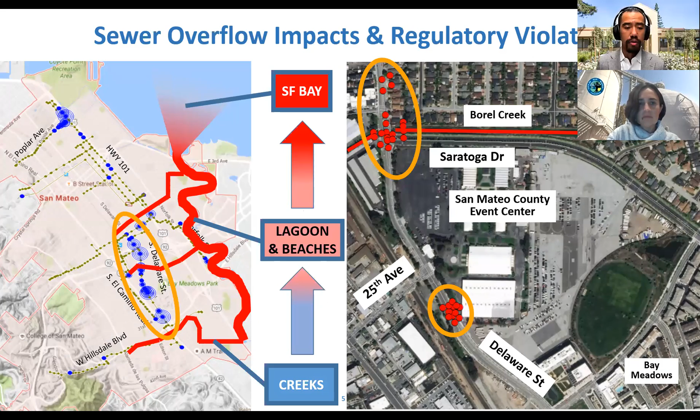So why are we here? Primarily because of sewer overflow impacts and regulatory violations. If you see on the diagram on the left, the blue circles are all the sanitary sewer overflows that have occurred historically and in our model, and a lot of them are occurring along the Delaware corridor. When a sanitary sewer overflow occurs, it pretty much flows out of the manhole onto the street, into the gutter, into the storm drain, into the creeks, and then eventually into the San Francisco Bay.

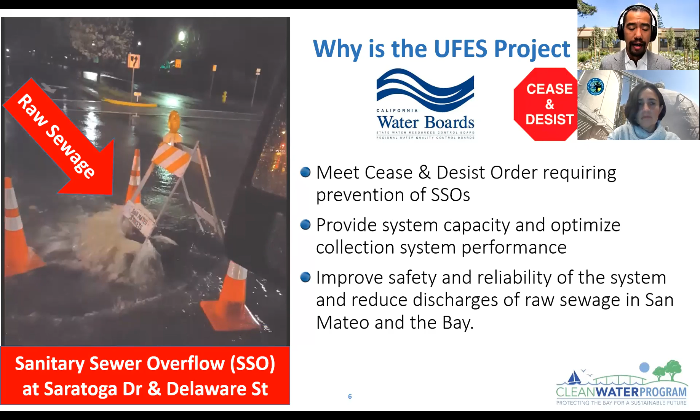So we ultimately want to stop this. We are aware of this, we've been aware of this, and even the California Water Board is aware of this, and they've issued a cease and desist order in 2009 requiring the city to prevent sanitary sewer overflows. This is why we're spending a significant amount of money to improve our wastewater infrastructure. We want to provide system capacity and optimize collection system performance, and overall improve safety and reliability of the system and reduce discharges of raw sewage in San Mateo and the Bay. This ultimately will help provide good for the environment as well as our community.

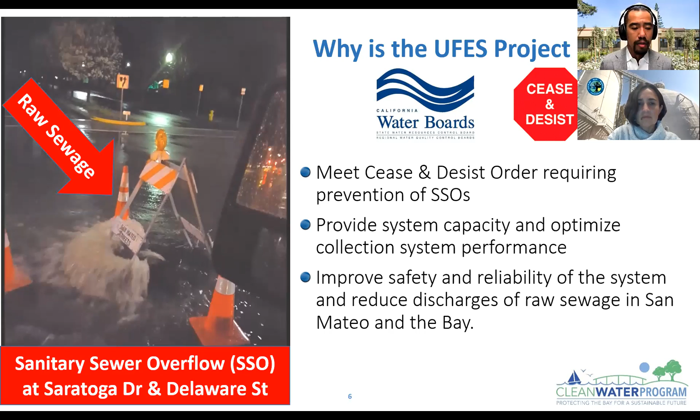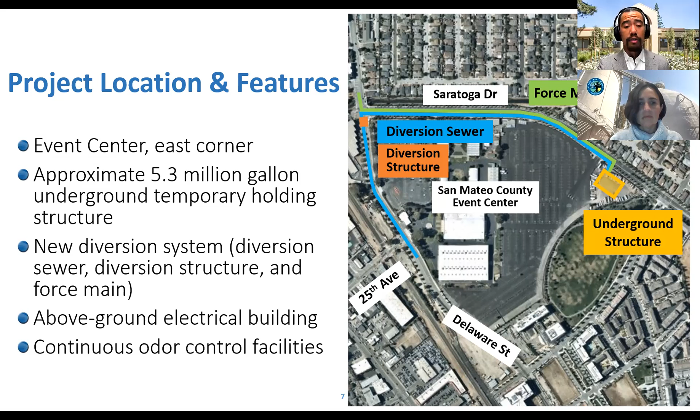The other components to this project is we're going to have an above ground electrical building that's also going to be located adjacent to the underground structure on the event center site, and continuous odor control facilities.

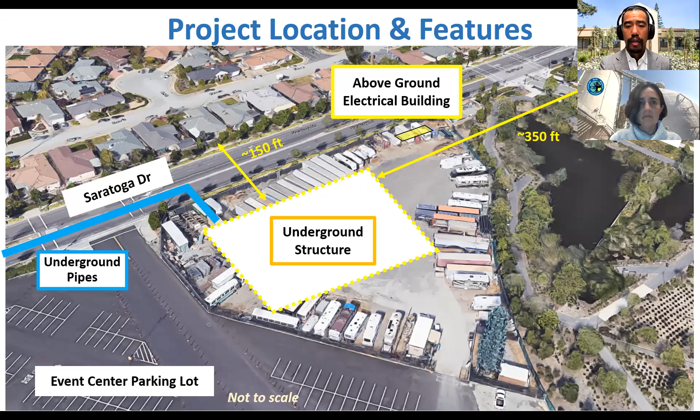This is another aerial rendering of what the structure will look like, and some perspective as to how far it is from the adjacent communities. The underground structure is shown there. It's approximately 150 feet from the excavation to Fiesta Gardens' closest residential properties, along with 350 feet to the Bay Meadows community across 28th.

We also wanted to talk about the construction contractor pre-qualification process. The contractors that we reviewed, we basically advertised out to obtain statement of qualifications, and every contractor that was able to bid on this project met these pre-qualification criteria requirements. Some essential requirements such as license and insurance, history and performance, health, safety, and labor compliance, references and experiences. We wanted to make sure that whichever contractor bid on the project were qualified to meet it, and not everyone who submitted a statement of qualification met these requirements.

So ultimately in May, we awarded the construction contract to Anderson Pacific. They are leaders in the construction of water and wastewater infrastructure. They have over 53 years of experience on similar projects to ours, and they have, since the beginning of working with us, proactively identified risks and collaboratively worked with us to identify solutions.

Now, what to expect during construction. Tom Williams is going to be talking a lot about the UFES activities on the event center site by phase. There's 6 different phases. I'm not going to talk about them here, but Tom will walk through all of those, including the pipeline construction. And then Bethany Lopez is going to talk about the traffic control plan requirements associated with that pipeline construction.

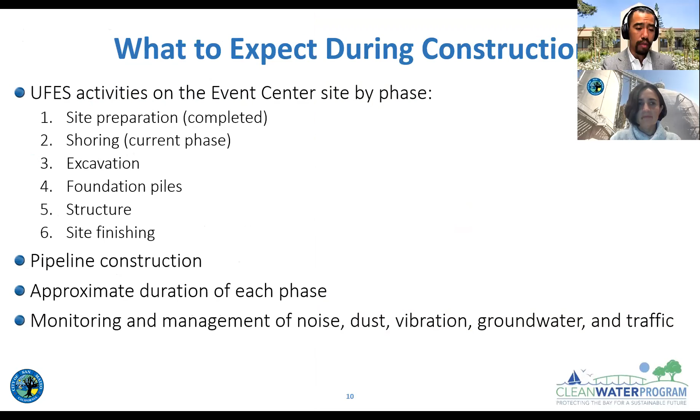In terms of traffic routes for the event center site, we actually purchased an easement from San Mateo County, since a lot of the construction traffic coming to and from that underground structure will need to route through that access easement to Delaware, instead of routing across Saratoga to get to the site. This was at the request of the community when we were getting the special use permit for the project, and one of the conditions of approval was to route a majority of the traffic along this easement route.

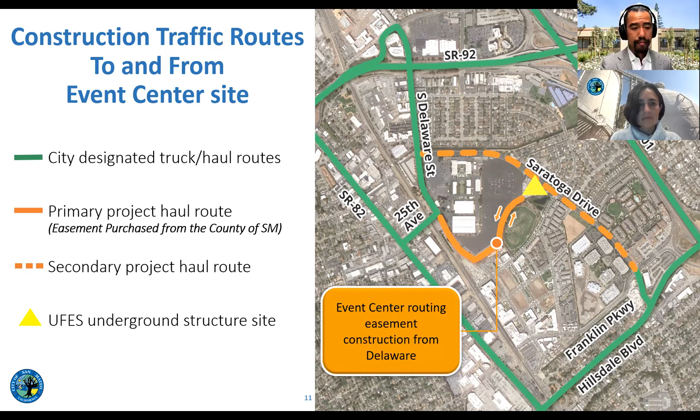Coming up next are some explanations about the different phases of the event center site from Tom Williams.

All right, very good, I think I've turned my video on. So you all are probably familiar that the work started, and there was some site preparation. It's not a very complex site, so essentially it needed to be cleared. There were some trailers that had to be moved, and they had to do a little bit of grading. That's complete, now we're at the shoring phase, so we can go to the next slide.

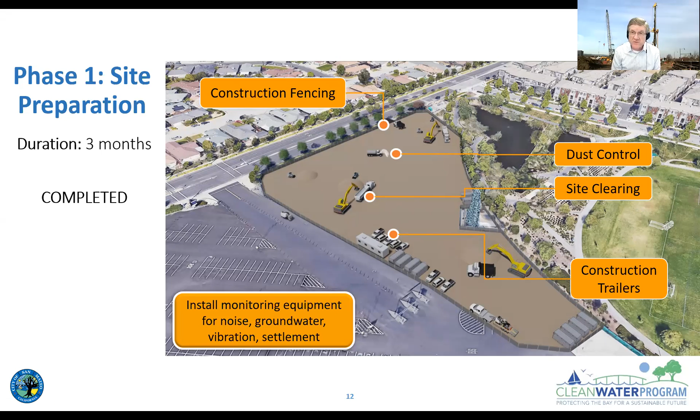So what we're doing is, in order to isolate this structure and protect the groundwater levels, we're building a watertight box, essentially, and we're going to build another concrete box inside it. What's happening today is they're doing a deep soil mixing wall. The machine you see with the tower, like a drill rig, is mixing concrete with soil and forming a watertight barrier around the perimeter, and inside that we'll excavate. That's what's happening currently.

There's a little bit of soil waste that will be removed from the site, but mostly a little bit of cement being delivered, and the cement's mixed on site.

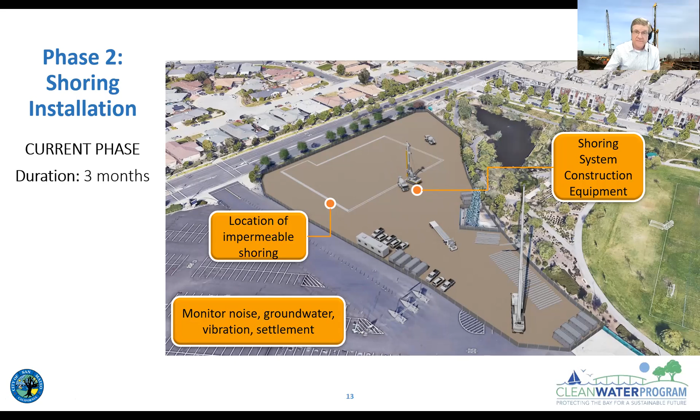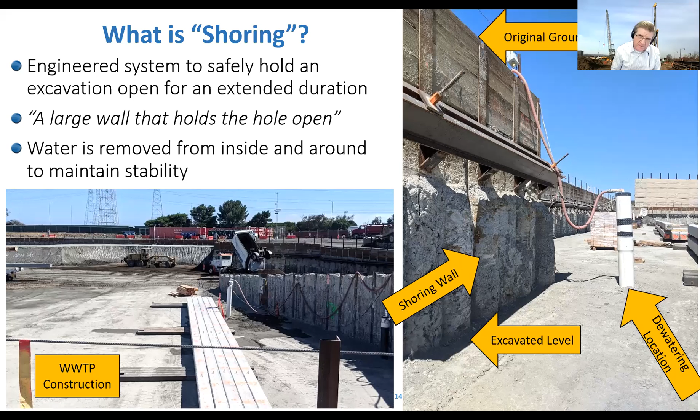It's reinforced with steel, and then there are special tie rods that go back into the ground that keep the wall vertical while we do the excavation. This is the actual equipment working - you can see in the picture on the right, the steel beams that have been put in place. They form the reinforcement for this concrete wall, and it essentially goes around the perimeter.

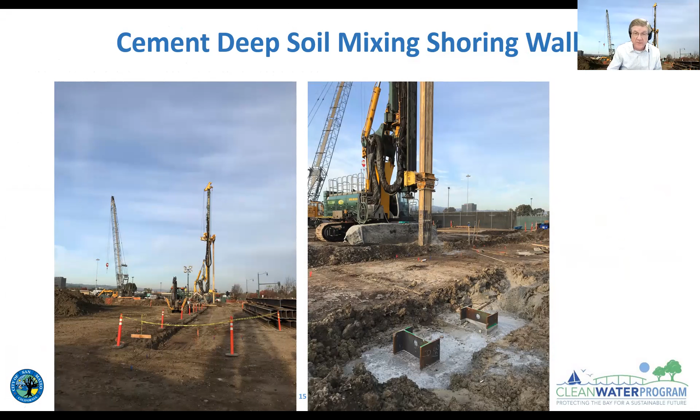Now we will withdraw water from the inside, but it won't let the groundwater enter from the outside, so we won't draw down the groundwater in the perimeter. This is essentially the dewatering plan - you can see the water's drawn out of the pit where we're working, but there's very little effect on the groundwater. Now we're monitoring all this.

We're monitoring the pit, and we have wells around the neighborhood that are watching the groundwater levels, so we have a trigger point. If they drop below a certain level, if it's too much, we would stop work. But groundwater goes down very slowly, so we would know well in advance if we were pulling down the groundwater. Next slide.

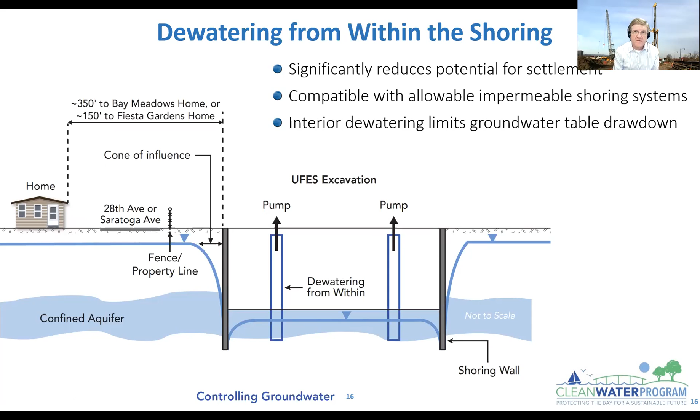And then as this wall is finished, excavation will begin, and that's probably the heaviest work that'll be visible. Dump trucks will arrive, and they'll be loaded and haul away the spoil material from the pit. There's a timeline slide coming, but that goes on for 5 months, and that will be essentially the work during that period - we'll be digging out that very large pit for the construction.

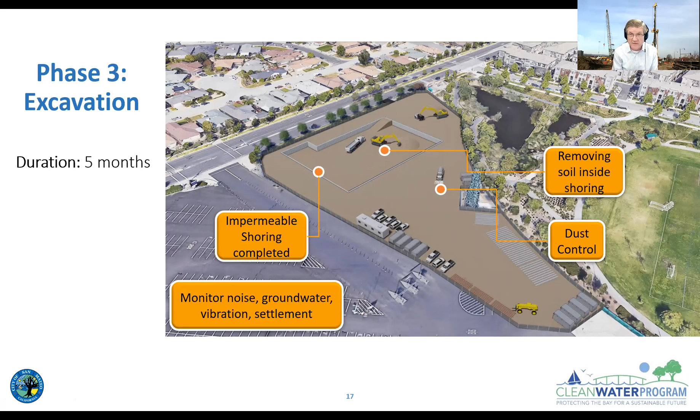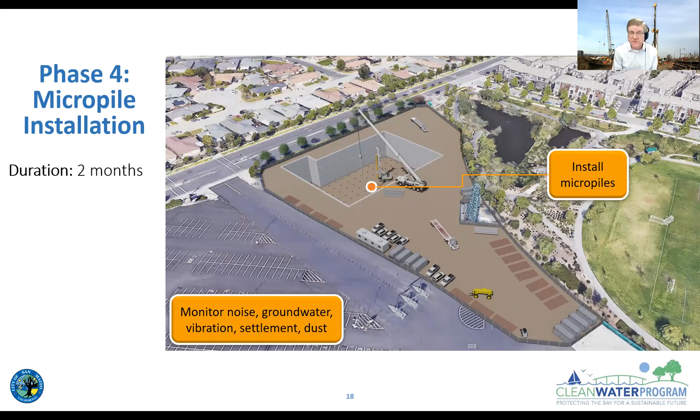Next slide. And once the pit's dug, then micropiles are installed. Now these piles are drilled, and they're small, they're short, and they're not hammered, so there shouldn't be very much noise associated with them. That's how the machine looks - it's a small machine that drills this pile, and for stability of the structure, they keep it from the uplift from floating. The structure's empty most of the time, so there's a fairly large uplift pressure on it from the groundwater, and they're just part of the structural integrity of the building. Next slide.

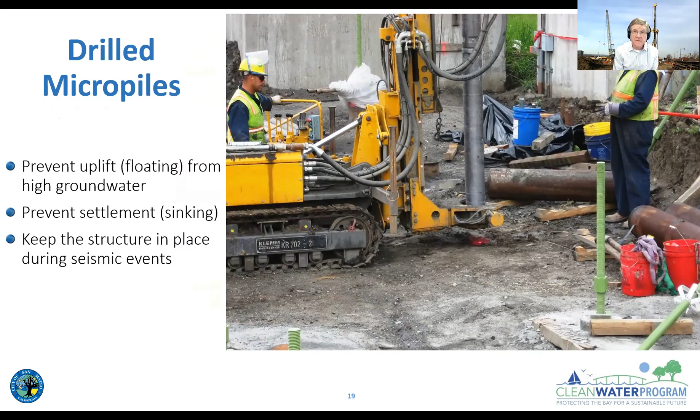So after the piles are drilled, we can begin the slabs and the concrete work. This will be the structural phase, and it will take many months of construction. It's a poured concrete structure, so there'll be a lot of concrete arriving, generally about once a week there'll be a pour with a flurry of activity, and the rest of the time will be finishing and preparing for another pour.

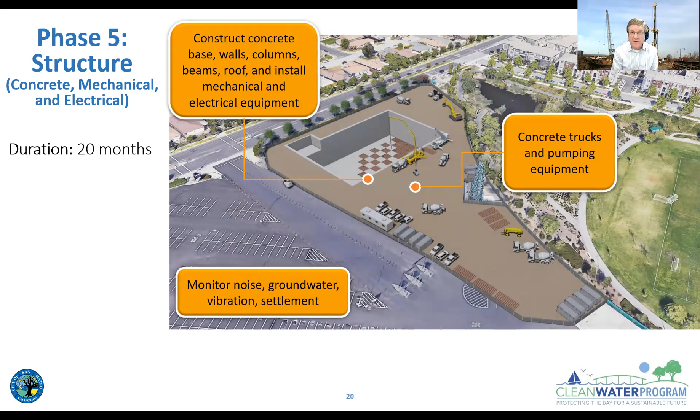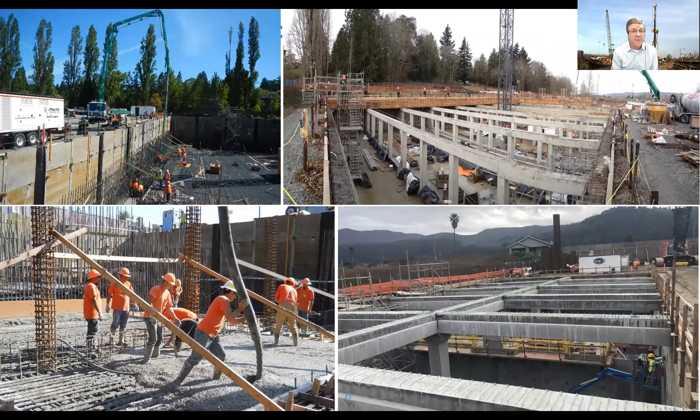These are examples of this type of structure being built in various places. It's a pretty intense operation with lots of concrete work.

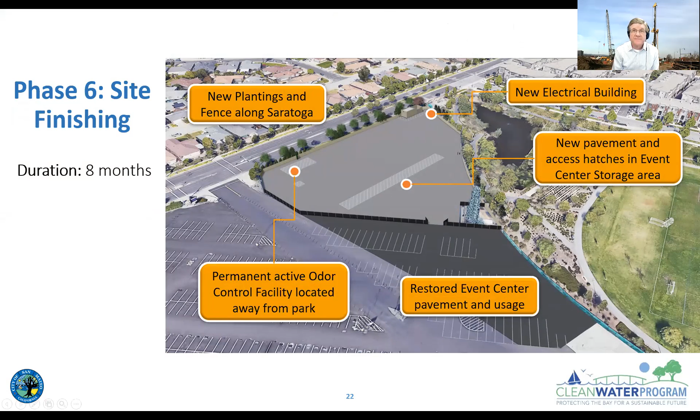There's a total station on the Saratoga side on the fence. There are reflectors, prisms placed in strategic locations all around the area, and this surveying instrument is measuring those constantly, watching for any movement or changes, any tilt. There's prisms on the two Bay Meadows buildings on 28th near Saratoga, prisms in the street, the sidewalks, the wall across the street at Fiesta Gardens, and prisms in the parking lot at the event center, and various other ones. There's a numerous set of prisms, so we're watching for settlement through those.

We're watching for vibrations, noise, dust. We've got the camera, we're watching groundwater. There are groundwater wells strategically placed in the neighborhood, plus we have on-site wells. So there's quite a bit of monitoring taking place. Plus we've done home surveys for homes that elected to have those surveys done in Fiesta Gardens and Bay Meadows.

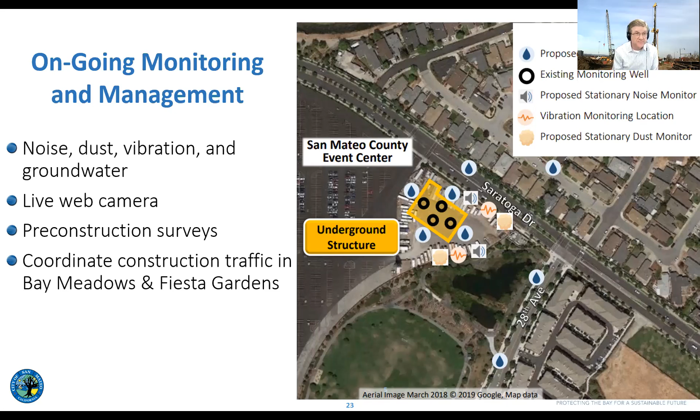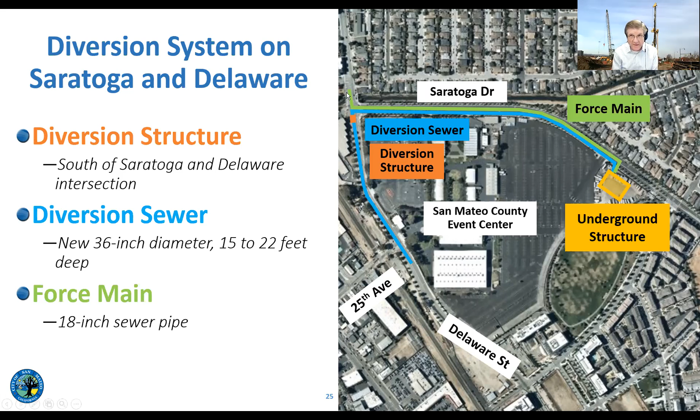Now, to make this system work, there's a set of diversion pipes. In an event, the wastewater has to be diverted into the structure, and when the event's over, it has to be pumped out. There'll be a pipeline built in Saratoga Drive, another pipeline in Delaware, and a force main installed in Saratoga, but it'll be done by slip lining an existing sewer with a resin material, so it won't involve so much construction. This force main will terminate with directional drilling to get under the obstructions at the end.

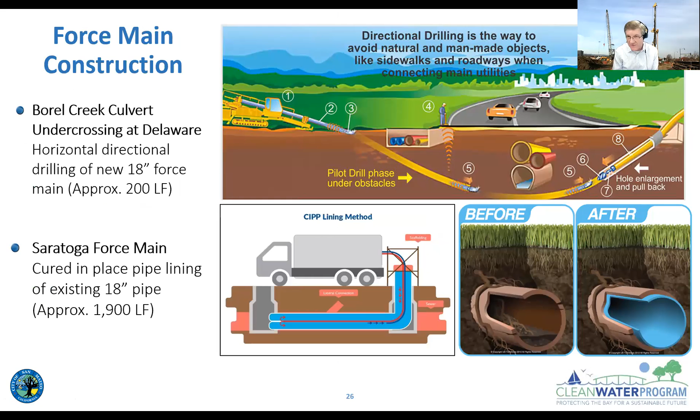So there'll be that work near Delaware and Saratoga. This is the pipe system that makes this work, and it also involves a structure at the intersection of Saratoga and Delaware that essentially is the valve that makes the system work - it diverts the flow to the structure. It's a rather large concrete box also, but not as large as the UFES tank. It'll all be underground, under the street. Nobody will be aware of it being there other than the manhole lids, the hatches.

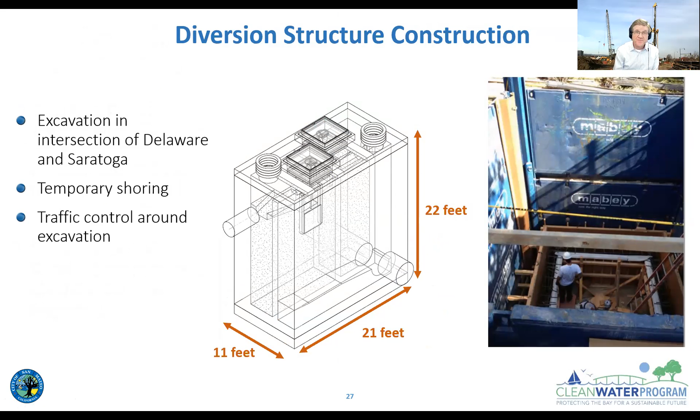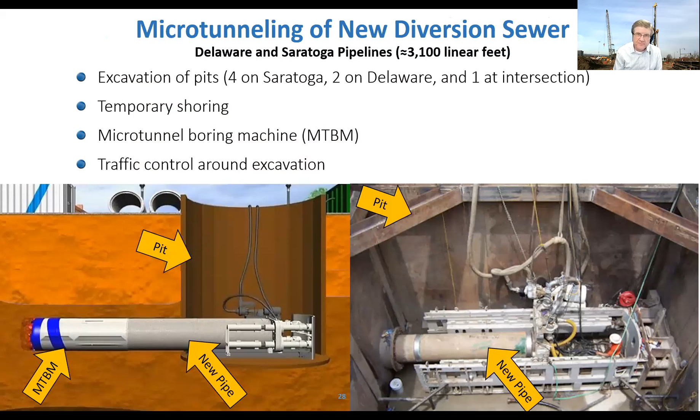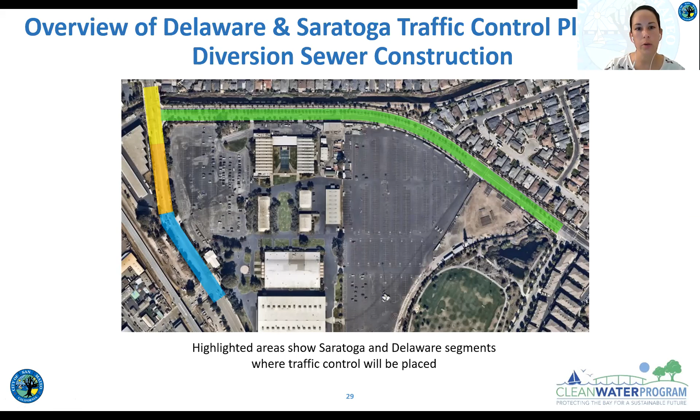So I'm going to talk about how the traffic control for this work is going to occur in this area, and really just kind of lay out the sequence of events for how this all gets accomplished. You can see that there's different colors on the screen, and those all represent a different phase of the work. Some of these will be occurring concurrently, and I'm going to go through how some of those are going to operate in conjunction as well.

We did also want to try to minimize the impacts to these various modes of traffic. So we'll talk a little bit about some of the options that we pursued, or considered several other options, and in an attempt to minimize the impacts to these other modes of transportation, some of those were not pursued because of the duration that they might have, or the impact that they may have.

We did also want to maintain the access for the event center. As you guys are aware, there's COVID testing occurring there, and so we again wanted to make sure that that was unimpeded. And if there are perhaps events down the road, that those events are not impeded either.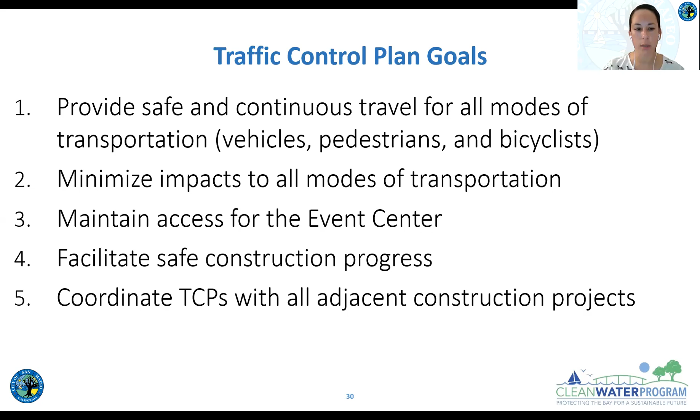We wanted to facilitate the safe construction progress going through this area, and also coordinate with a lot of the other traffic control plans that are going on in this area. So you guys are, I'm sure, very aware of the other construction that's going on in the southerly parts of this section of Delaware. All right, so moving into the first phase.

The first phase is work that's going to occur along Saratoga. The primary function of this traffic control is going to allow for the southerly part of Saratoga to be closed. You guys can see the green here, where the green is shown - that's where that microtunneling that Tom was just referring to is going to be occurring on that side of the roadway. So what that means is that we are going to be shifting the traffic to the northerly sides of Saratoga. These are the westbound lanes.

So these westbound lanes are going to be used to facilitate both eastbound and westbound traffic. We'll be putting up delineators between the traffic to make sure that it's very clear. I'm going to be doing some dive-ins on each one of these intersections to show exactly what that looks like in a little bit more detail.

Some of the other points of this are that, instead of having the eastbound bicyclists in the roadway where they normally would be, we're moving them onto the eastbound or southerly sidewalk, which is adjacent to the event center. And you'll note on the right side of this that we're moving pedestrians, all pedestrian activity, to the north side of Saratoga Drive here.

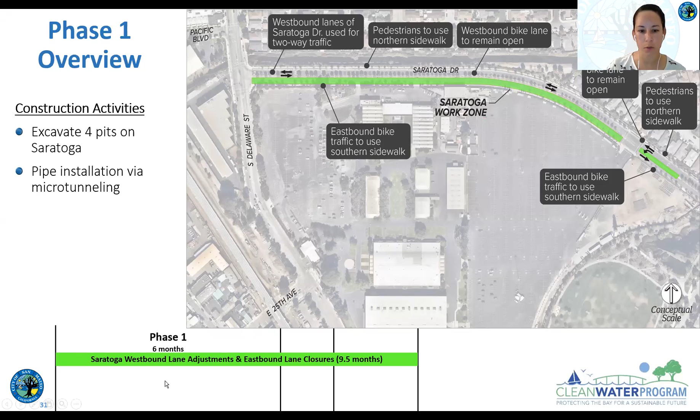As Tom mentioned, this is going to be used to excavate 4 pits along Saratoga. You can see that this phase is going to last for about 9.5 months. You'll see how this phase alone is only going to last for 6 months, and I'll walk through a couple of the other phases that are going to also occur at the same time as this phase. All right, so diving a little bit deeper in, this is the detail of what's going to happen at the Saratoga and Delaware intersection for this first phase.

As we mentioned, the Saratoga eastbound lanes will be closed. We also mentioned that we are going to be detouring pedestrians to the northerly sidewalk, and we will allow bicyclists to use the southerly sidewalk. So in this, we're also going to be facilitating turns from Delaware onto Saratoga. In order to do so, we're going to have to cut back some of this median that's here dividing these lanes.

We're also going to be installing a temporary stop line to push some of the westbound traffic back a little bit, again, to help facilitate some of this movement.

The bike lane on westbound Saratoga is going to remain in place, in its existing location. It's also good to note that this traffic signal will remain on and functioning during this time. That's a really important note because we are familiar with the traffic coming through in relation to some of the other projects, so we wanted to make sure this traffic signal stays functional.

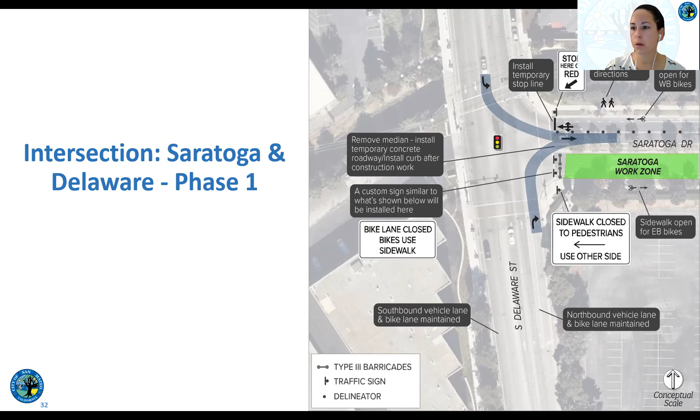So doing another dive into this, we're going to show a quick cross section of what this looks like. You can see the purple arrows on top here, looking easterly on towards Saratoga from Delaware. As mentioned, eastbound traffic is going to be here in the middle lanes, and we're going to maintain westbound traffic as well.

We'll have westbound bike lanes adjacent to the westbound travel lanes as they are today. Pedestrians will be using the northerly sidewalk, and eastbound bicyclists will use the southerly sidewalk. We'll have detour signage at the intersection to make sure it's really clear where everybody's supposed to go. You'll also note the work zone signage that makes it clear that the southerly portion of Saratoga will be closed.

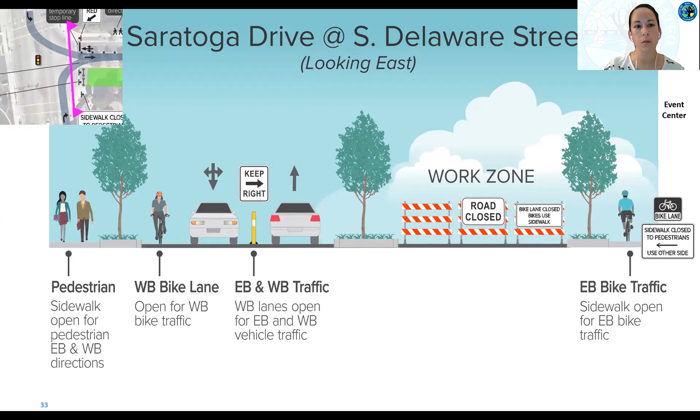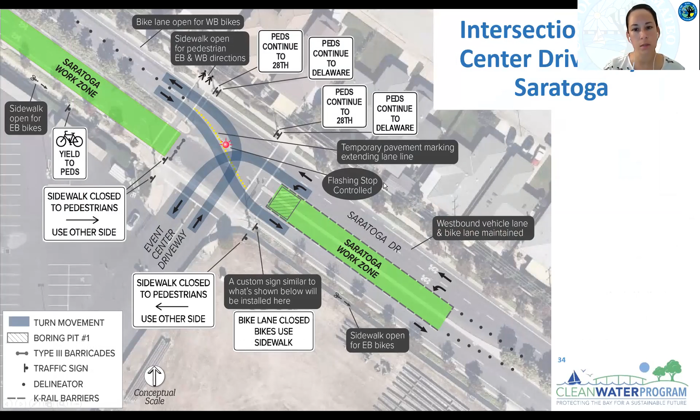Moving on to the next intersection, this is the event center driveway along Saratoga. The first thing to note is the signal is going to be in flash, and you can see these are some relatively complex movements that we're facilitating through here, which is part of the reason we wanted to put this signal in flash, to make sure all these movements can be facilitated safely.

You'll see here that we again have signage for bicyclists to be on the southerly sidewalk, for pedestrians to use the northerly sidewalk, and for pedestrians to travel to 28th to come back to the southerly sidewalk. We think that'll facilitate some of the connections to and from the neighborhoods and other destinations in this area.

You'll also note that at this location, this is where eastbound traffic travels back over to their regular eastbound lanes, and westbound traffic is maintained in its current location. However, we are reducing the westbound lanes down to one lane through here. The work zone is blocking the existing left turn lane, so we're going to convert one of those through lanes to a left turn lane. This is all to ensure we have access to and from the event center driveway.

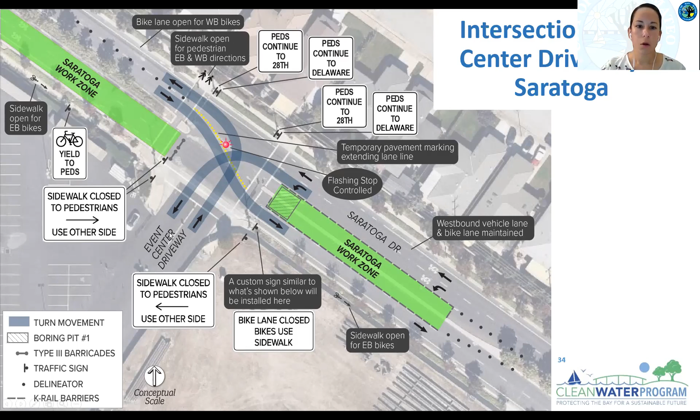We're going to do another quick dive into this, looking east again on Saratoga from the event center driveway. Note the pink arrows, and this is the direction we're facing. Starting in the middle, we converted that number one through lane to a dedicated left turn lane, where we have the existing left turn lane closed. Thank you, Derek, for your expert arrow pointing here.

And then westbound, we have one westbound through lane here. The westbound bike lanes are being facilitated in their existing location, and pedestrians are being routed to the northerly sidewalk in this area. Still through this area, bicyclists will continue using the southerly sidewalk, the one adjacent to the event center, and they'll be detoured back to Saratoga at the 28th Avenue intersection.

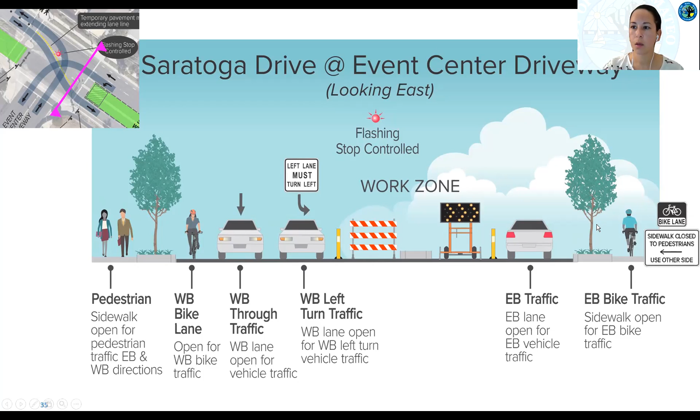All right, so that's phase one, and we're going to move on to phase two. Phase two introduces work at the Delaware Saratoga intersection, and this work is going to last for about 8 3/4 of a month. The overlap between these two phases is going to be about 1 1/4 months.

Some of the work that's going to happen here is that the A pit will start to be excavated, and some of the pipe work required for the project will be done through microtunneling in this area.

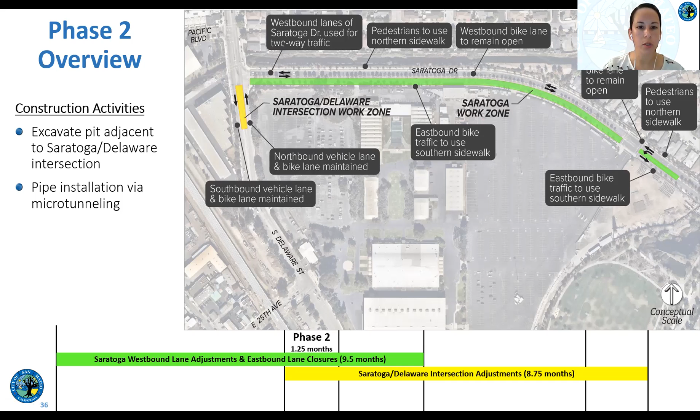Everything on Saratoga that we just discussed will remain the same. The changes on Delaware include some shifts in traffic for the northbound bike and vehicle lanes. However, the southbound lanes are going to be dropped down to one single vehicle lane, but the bike lanes are going to be maintained here as well. We're going to do the same thing we did for phase one, doing some dives really quickly so we can see some of the details.

So again, the Saratoga work is going to remain in place. We'll have the same detours. Bicyclists will be using the southerly side, pedestrians using the northerly side of Saratoga.

However, you can see the large work zone in yellow on Delaware now. For the northbound direction, vehicles and bikes are going to share the lane here. For the southbound direction, one of the southbound lanes on the approach to the intersection is going to be closed, and we'll have one southbound lane going through. We're maintaining the southbound bike lane through this area.

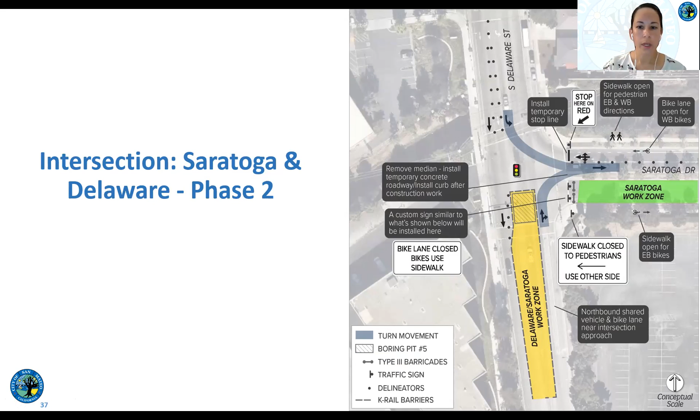Moving on to the next slide. We're looking southbound here, and starting in the middle, we have the work zone. Working our way to the left, we have the shared northbound traffic, which is vehicles and bicyclists. In this phase and area, pedestrians are allowed on both sides of the roadway, like normal. For the southbound traffic, we'll have one southbound vehicle lane, and the bike lanes in the southbound direction will be maintained as well.

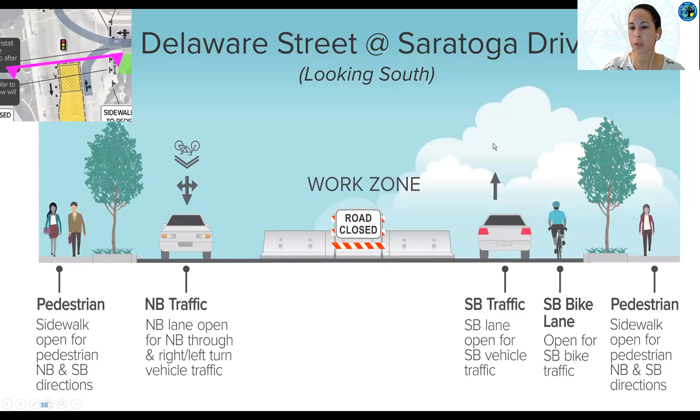Moving on to phase three. Phase three introduces a new set of pits, which will help facilitate the microtunneling installation. On Saratoga, we're finishing up some of the work in the Saratoga Drive area, installing manholes and starting to backfill some of those pits. This is the last phase for that Saratoga work, and it will overlap with this new orange Delaware work for about two months.

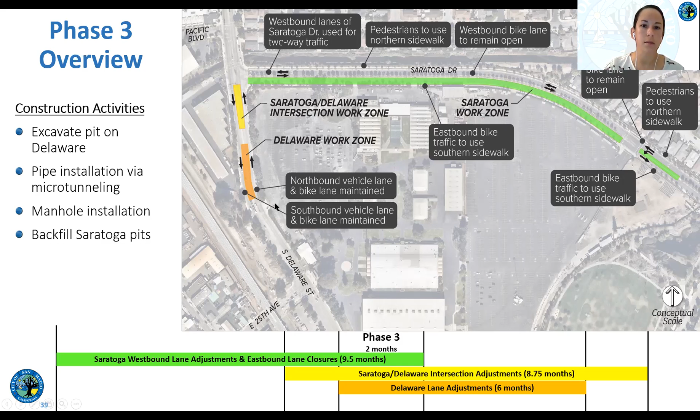The orange Delaware work is going to happen for about six months. We're going to be reducing northbound and southbound lanes to one lane in each direction. The bike facilities here are going to be maintained, and everything on Saratoga, as we mentioned, is going to stay the same. Everything at the Saratoga Delaware intersection will stay the same as discussed previously.

Moving on to the last phase of work. This phase is primarily going to be focused around Delaware and 25th and a little bit north of that intersection. We'll be maintaining the existing bike facilities in this area. However, the southbound bike lanes will be shifted so that they're shared through this area. We'll touch on some of the details of this in just a moment.

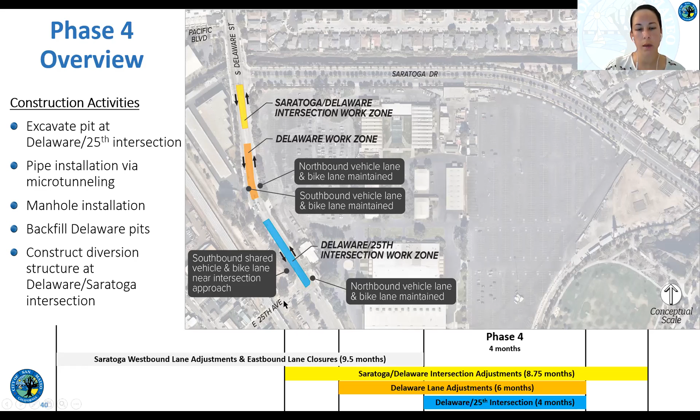One of the main things here is that the work on Saratoga has now been completed, so Saratoga is going to reopen during this phase. Some of the backfill work and manhole installation is going to occur for some of these northerly pits. The yellow work is still going to occur through this time at the Delaware-Saratoga intersection, and that's when some of the diversion structure is going to start its installation.

Going on to the next slide, northbound vehicles and bike lanes will be maintained as they are on Delaware. Southbound vehicles are going to be shifted so that they're shared with the bike facilities, in a single lane going southbound. We are maintaining eastbound traffic from 25th to Delaware, and we expect this work to happen after the grade separation occurs.

However, we are going to be restricting left turns from northbound Delaware onto westbound 25th. We anticipate that this work will occur after both the 25th Avenue work and the 28th Avenue work are complete. So we anticipate being able to detour vehicles at 28th westerly as they would like to travel through this area.

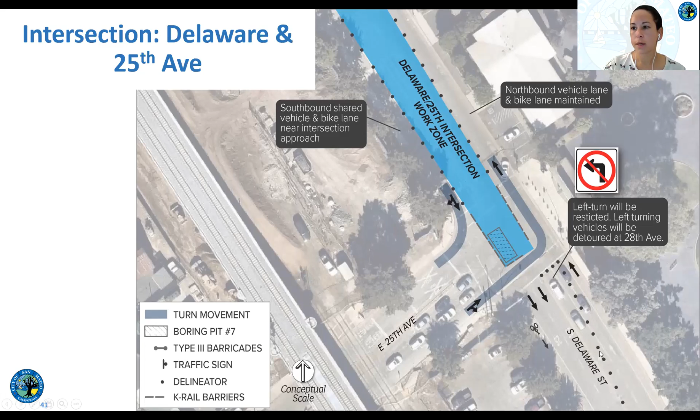And so for the last stage, all that remains is the work at the Saratoga Delaware intersection. They're going to be completing the work on the diversion structure, completing any sewer tie-ins, and completing the work to backfill this pit and close everything up.

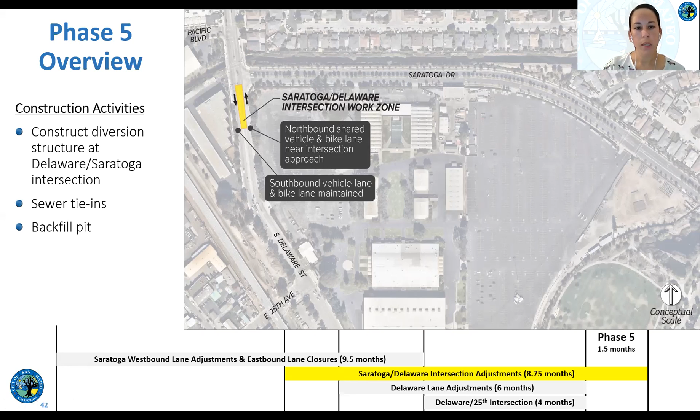And I think that's about it. All the traffic control in this area will stay the same, but again, you'll notice that the rest of Delaware and the rest of Saratoga will be open as indicated here.

This next slide is really an overview of the construction schedule that we have anticipated. Up at the top, we have the years 2021 through 2023. Overall, this project is approximately 36 months.

The event center site activities: we've started and completed site prep. We're currently shoring, and in the beginning of the year, starting to do excavation along with piles. Then the structure, as Tom indicated, is going to be approximately 20 months.

The bars here are color coded, so this is all the work in purple occurring at the event center site. In relation to those activities, we've also transposed the diversion sewer activities along Saratoga and Delaware. Both the excavation and shoring should be finishing up, with excavation starting just as the Saratoga lane closures begin.

The diversion sewer activities along Saratoga and Delaware are approximately 15 months in total. Bethany provided durations for each of the segments where work is occurring in each phase, including durations for any overlap of work along Saratoga and Delaware in the different segments. Overall, it's 36 months as I indicated.

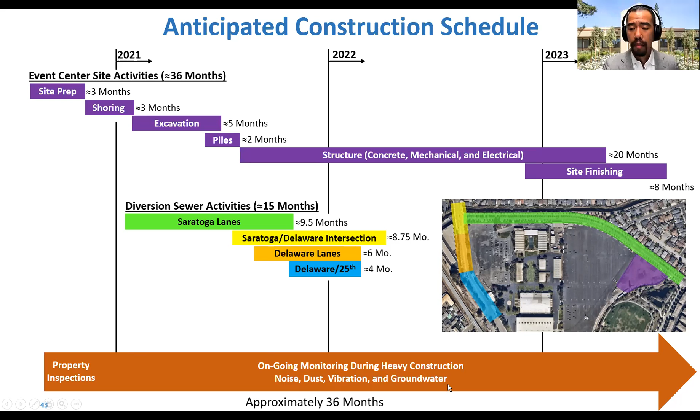Tom also indicated that we've conducted property inspections for those who have elected to do so. We're going to do those every 6 months as identified in our conditions of approval, as well as do ongoing monitoring during heavy construction for noise, dust, and vibration, as well as groundwater monitoring to determine if any settlement occurs.

These are our standard construction hours, identified as part of our planning application and conditions of approval. They're also posted on our project sign and abided by our contractor, managed through the construction management team. Work hours on the event center site are Monday through Friday, 7 a.m. to 7 p.m. The typical construction day is 8 to 10 hours, and no truck hauling or delivery occurs between 4 and 5:30 p.m.

Work hours in the street are a little different. Along Saratoga, it's only 8 to 4, while on Delaware it's 8 to 5. There is no construction work planned for weekends or outside these approved hours, but there is an exception when required, for example concrete pours. Once you start, you can't really stop — we have to finish the pour. Whenever that occurs, we notify and get the exception from the city engineer, then do massive outreach and notifications to the adjacent properties and neighborhoods.

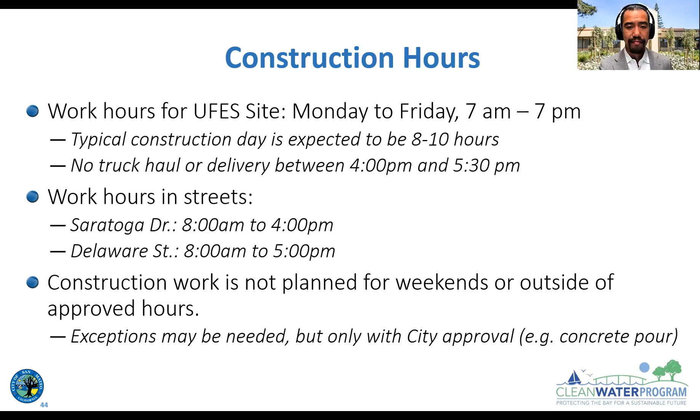I wanted to share some new webpage content, primarily our monitoring of the event center site activities. On the left here are screenshots of what the construction camera looks like. If you go to this URL, you could actually go see this right now. It's a construction camera at the eastern corner of the site, just off of Saratoga, and it has zoom features — you can see this guy in the backhoe here. I actually zoomed in to 600%, so there are zoom, pan, and live viewing capabilities that this camera has. It's pretty cool.

As for construction monitoring, further down the page we have four boxes indicating if there's any exceedances — for noise, dust, vibration, or groundwater — then we report it out. For example, noise: we didn't have any observed exceedances that exceeded the 90 decibel threshold. We also didn't have any vibration exceedances that exceeded 1 inch per second for more than 30 seconds.

But between the week of November 30th to December 6th, there was a slight exceedance of dust. On a week-to-week basis, we provide updates indicating if there's an exceedance and what the cause is, as well as the corrective action. In this case, the result was from equipment starting up and loading of cement trucks near the monitor, and the corrective action included wetting of the site with a water truck, after which particulate concentrations decreased.

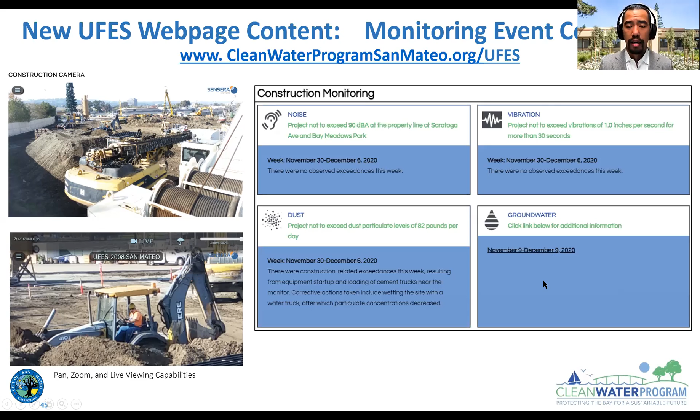Just an overview of our outreach and engagement channels. You may have heard about this community meeting through our project newsletter, specifically giving out news and notices about UFES project-related activities. We've also been promoting the subscription to our SMS text service. We primarily use this text to notice the community for any traffic adjustments and time-sensitive activities, such as concrete pours, and even utilize it to promote the virtual community meeting tonight. We also have the project webpage with status updates and monitoring information.

And then we have our UFES specific hotline, and I'll share that phone number at the very end here. But ultimately, it's me, Tom, and Ron, our construction manager, who answer the calls on this line. So if it's not a call center, it's directly one of the key members that are part of this team that are helping to oversee this project. So you get the firsthand experience with talking with one of us.

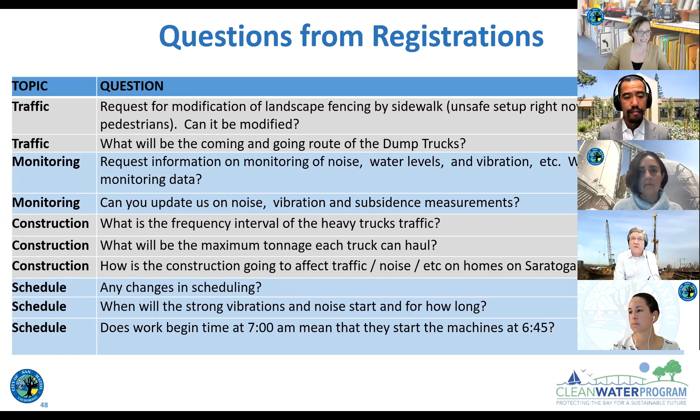So I guess I'll answer this question. The monitoring data is on the UFES webpage. If you go to the Clean Water Program and then click to the UFES webpage, the monitoring data is there. It's focused on exceedances. So you get a report each week for the week before that describes exceedances and what they were, what caused them, and what we did to mitigate them. So far, there have been no significant exceedances.

We had a dust exceedance back when there were fires around the state because the ambient air quality was poor, and another when construction equipment started near the monitoring equipment. The vibration devices are sensitive to any kind of disturbance - if someone were to stand on one or drop something nearby, we could get a little ripple. That's why we have the engineers evaluate the data.

Okay, thank you. And I think the very next question about monitoring is answered in your previous question. Okay, the next three questions are about construction. What is the frequency interval of the heavy truck traffic?

So the truck traffic does vary. The heaviest truck traffic will be during the mass excavation of the pit, and that could be a truck every 10 minutes or so. Other times there'll be a lot less truck traffic when the structure's being constructed. There'll be a flurry of activity on the day when concrete's poured and numerous concrete trucks will arrive, but that'll just be one day a week. So that period during excavation will be the heaviest truck traffic.

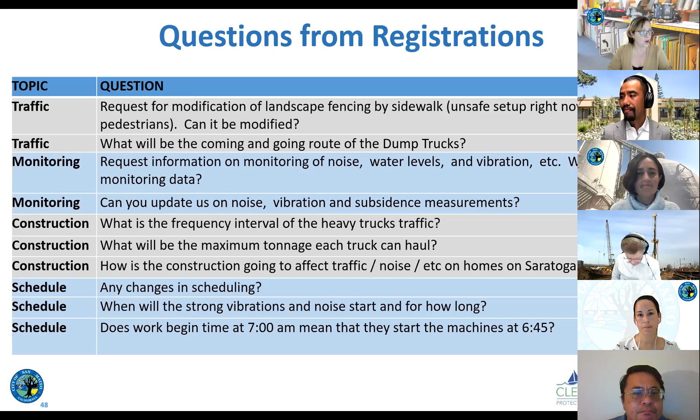Thank you. I'm a homeowner at 490 East 28th, right across from the site. I've got 5 questions - one follow-up on monitoring. It seems that there's no actual data on the site. Can you clarify, besides the well data, if we're going to actually be able to see live data, or if you're only going to be reporting exceedances in the past as you have so far?

Thank you, Jonathan. Yes, we will be maintaining the summary version of data sharing here. We will only be sharing any exceedances, except for the groundwater data, in which case we provide a little bit more information. But for the most part, as we indicated in the presentation, we will indicate if there haven't been any exceedances, and if there are, then we will share what the cause was and the corrective action.

Okay, but meanwhile, if during pile driving we see things shaking in the house, and there's not going to be any real-time way to address that, it's really going to be a phone call to ask whether or not it hit the red line. Is that going to be the procedure?